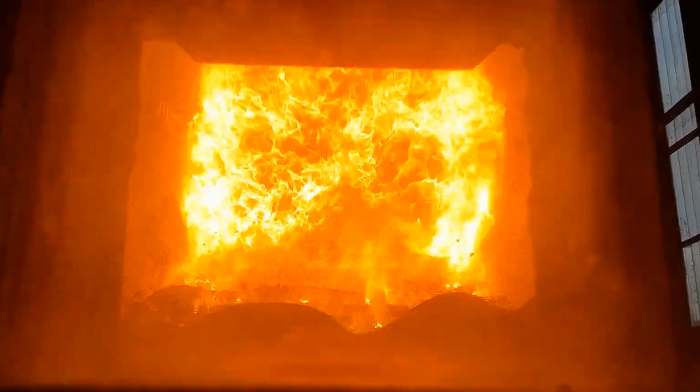Inside this building flows enough energy to power an entire factory. Temperatures can exceed 900 degrees Celsius. Steam pressure can instantly destroy equipment and kill people if handled improperly. But when operated correctly, this system becomes the heart of industrial production.

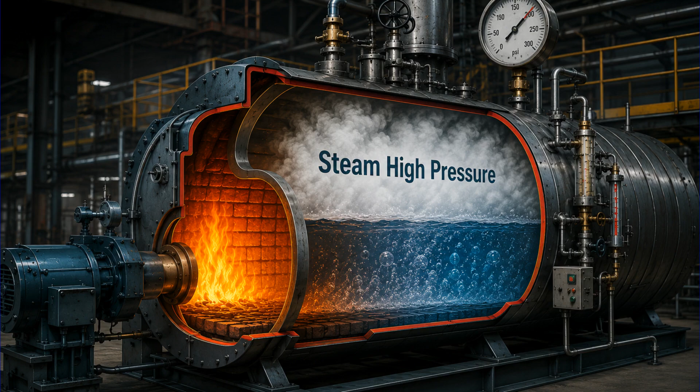Now, why does boiler training matter? Boiler systems contain extremely high energy and pressure. Many accidents are caused by poor understanding and panic during abnormalities. Safe operation requires discipline, observation, and understanding of principles.

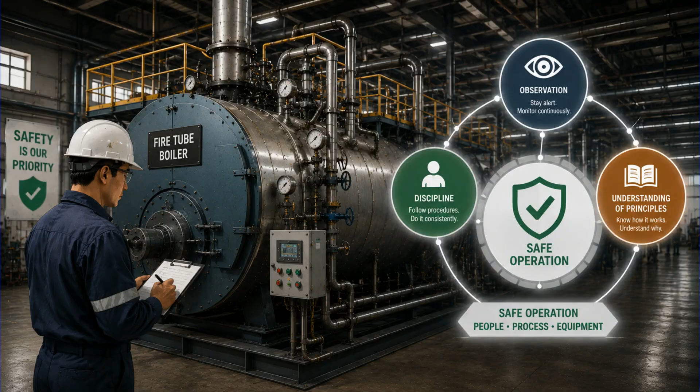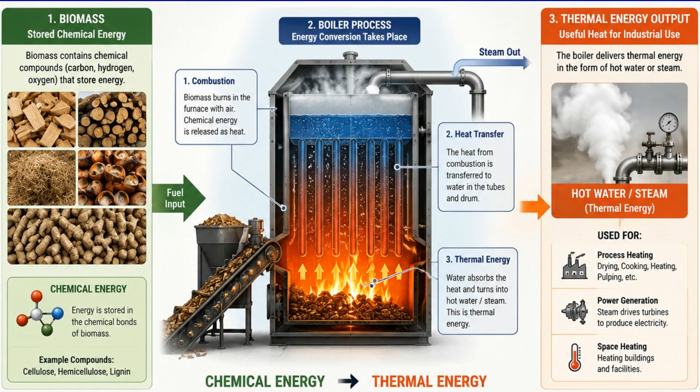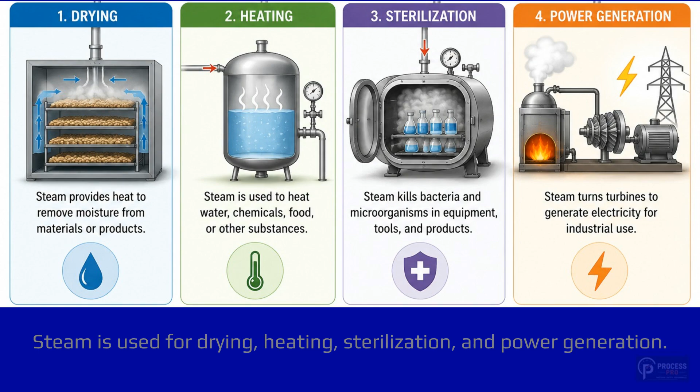What does a boiler room do? It converts chemical energy from biomass into thermal energy. Heat transforms water into steam for industrial processes. Steam is used for drying, heating, sterilization, and power generation.

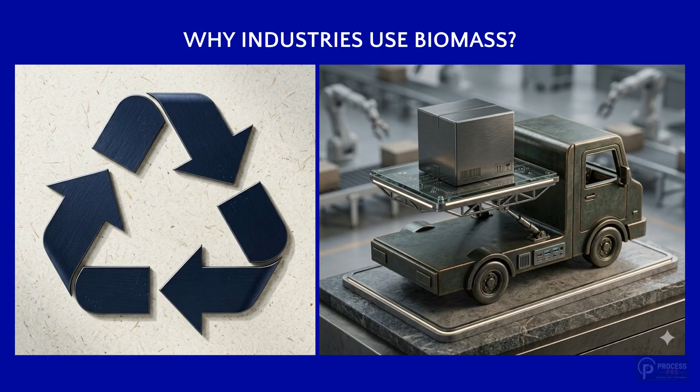Why do industries use biomass? Firstly, biomass is renewable and locally available. It reduces dependence on expensive fossil fuels. Common fuels include rice husk, wood chips, palm kernel shells (PKS), bagasse, and sawdust.

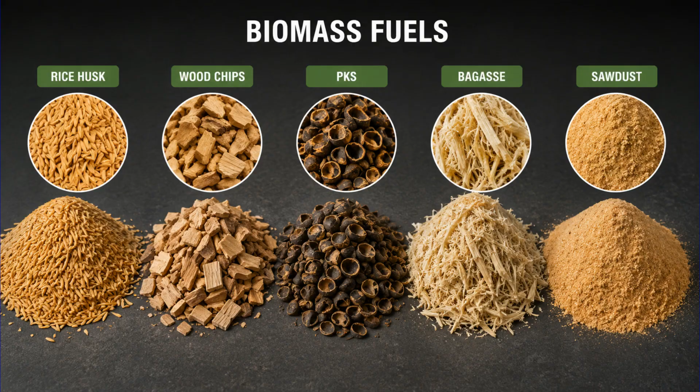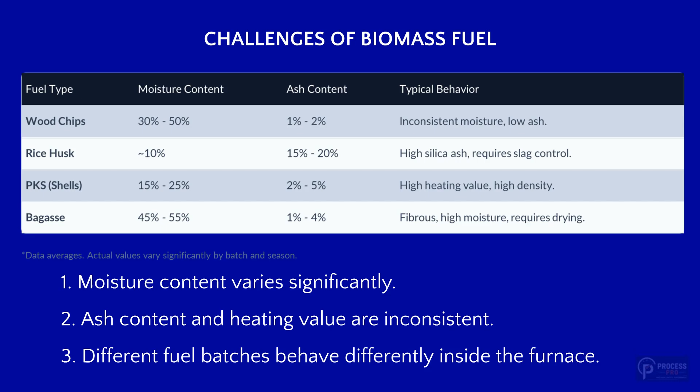But there are some challenges of biomass fuel. First, moisture content varies significantly. Second, ash content and heating value are inconsistent. Third, different fuel batches behave differently inside the furnace.

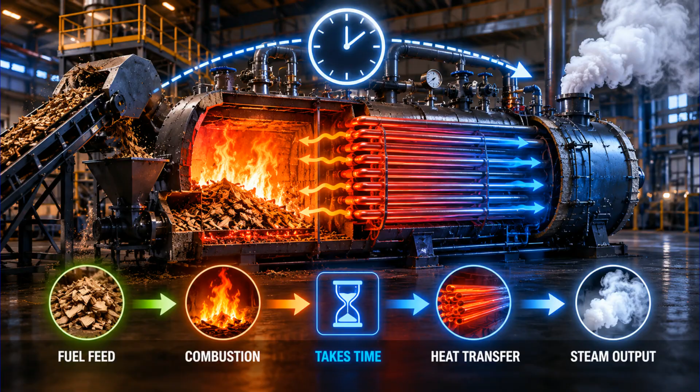Boilers are dynamic systems. Steam demand constantly changes. Boilers continuously balance fuel, air, water, and steam demand.

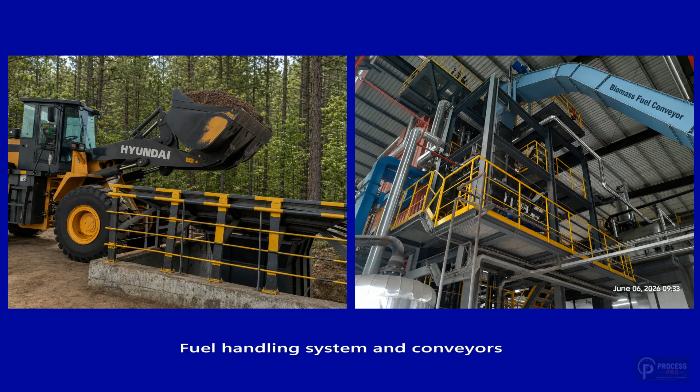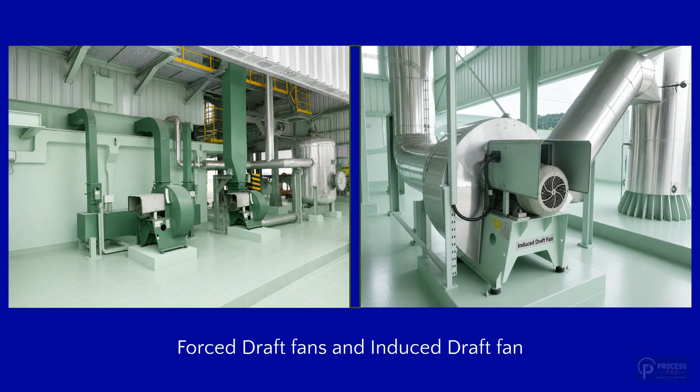And these are the major biomass boiler room equipment: fuel handling system and conveyors, furnace and boiler pressure parts, forced draft fans and induced draft fans, feed water system and de-aerator, water treatment and ash handling systems.

Boilers are forgiving until they are not. A boiler may tolerate poor combustion, dirty fuel, minor operator mistakes, temporary abnormal conditions, but accumulated neglect can suddenly become catastrophic. These are the critical boiler hazards.

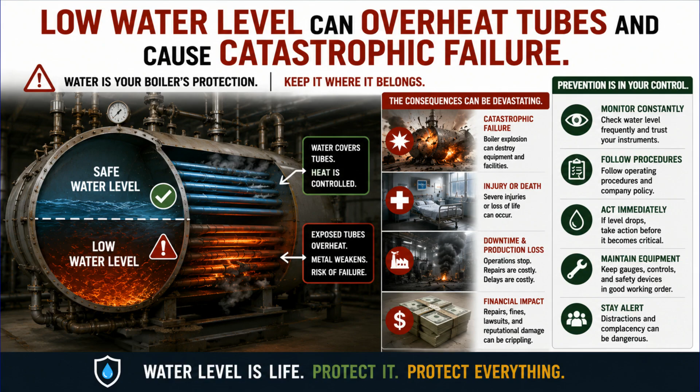Low water level can overheat tubes and cause catastrophic failure. Steam leaks can cause severe burns. Improper startup can lead to furnace explosions. Rotating equipment creates entanglement hazards.

It is very important to understand steam energy. Steam contains enormous latent heat energy. Water absorbs heat during vaporization. Stored steam energy makes boilers highly efficient and dangerous.

Most major boiler accidents are not caused by equipment alone. They are usually combinations of human error, poor communication, and unsafe decisions. These are some human factors in boiler operations. Fatigue and complacency increase risk.

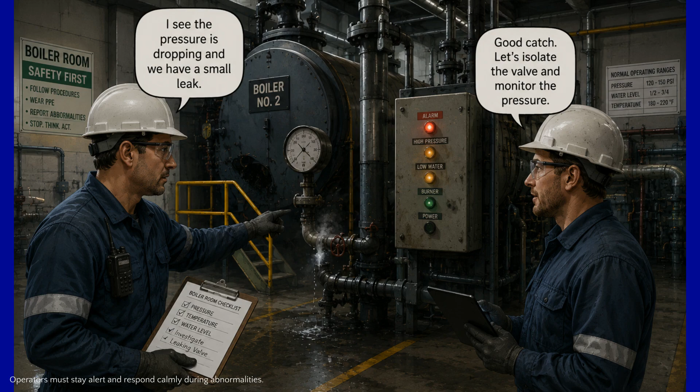Poor communication contributes to accidents. Operators must stay alert and respond calmly during abnormalities.

Traits of a professional boiler engineer.

Discipline and situational awareness. Accurate logging and observation. Teamwork and respect for procedures. Ability to notice abnormalities before alarms occur.

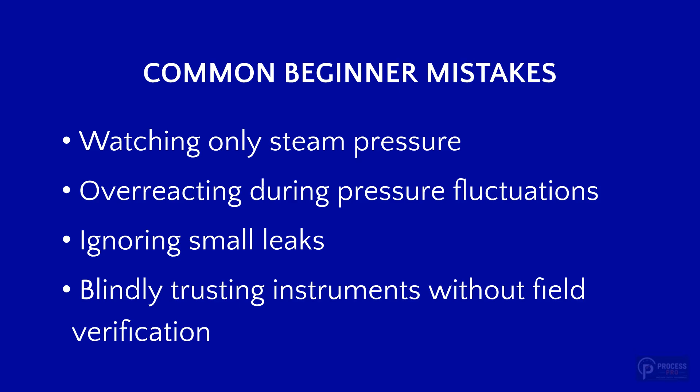Common beginner mistakes: first, watching only steam pressure; second, overreacting during pressure fluctuations; third, ignoring small leaks; fourth, blindly trusting instruments without field verification.

Environmental responsibility. Efficient combustion reduces emissions and fuel consumption. Poor combustion creates smoke and particulate pollution. Good operation supports both economy and environmental protection.

Key takeaways: first, boiler rooms are dynamic, high-energy environments; second, operator decisions directly affect safety and efficiency; third, strong fundamentals are essential for becoming a great boiler operator or engineer.

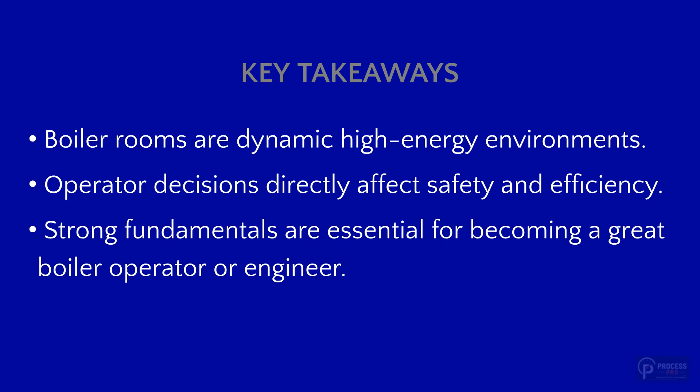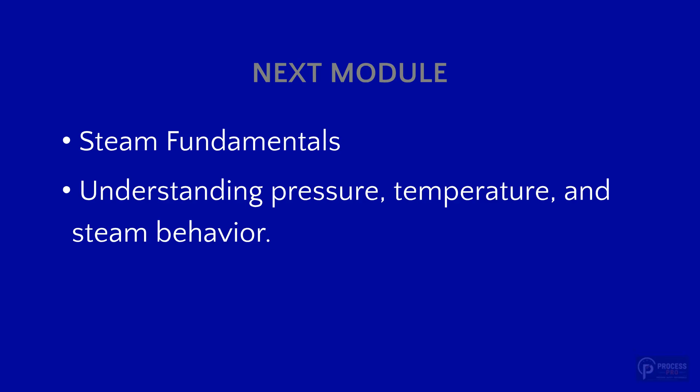In the next lesson, we'll dive deeper into steam itself, why it behaves the way it does, why pressure and temperature are connected, and why understanding steam fundamentals is the foundation of becoming a great boiler operator or engineer.